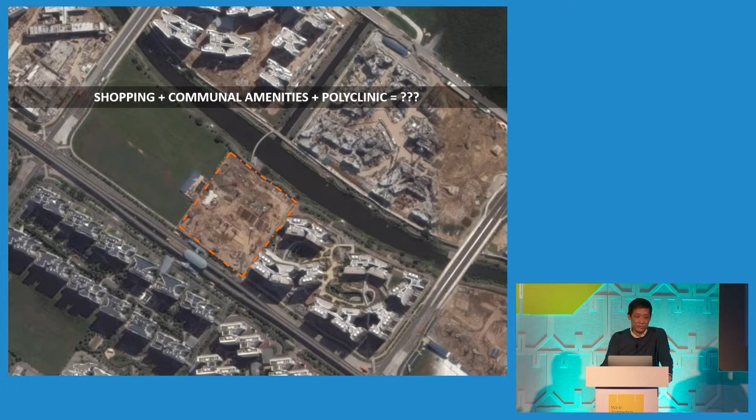In Koolhaas's Harvard Guide to Shopping, he wrote that shopping is arguably the last remaining form of public activity. So although insightful in certain measures, I do think there are other ways in which public activity can be nurtured. However, to date, the architecture of shopping in Singapore is this: a ubiquitous shopping mall, a superfluous monument of consumption as public activity. Its role is to internalize all activities, drawing the lifeblood from the street and the city.

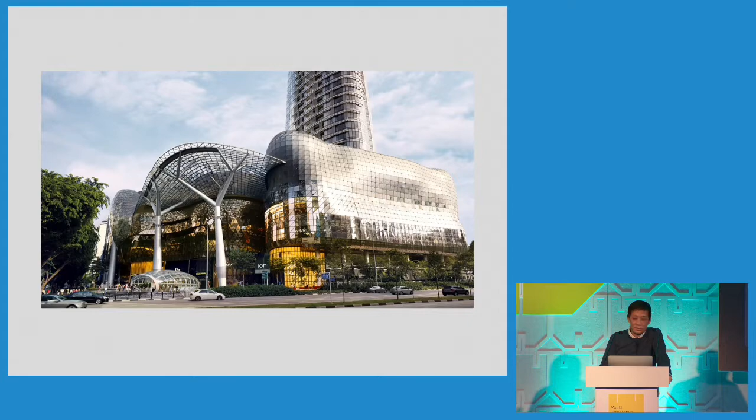Polyclinics and hospitals, on the other hand, are often designed and built as independent buildings set away from other programs and resources associated with the urban realm. And the closest independent typology is the community center. Historically, it's the town hall. Singapore, however, does not have this as a precedent.

So the main challenge for this project is not only for us to bring together these three disparate programmatic components in a new building typology, but also to harness an architectural grammar that will create meaningful communal spaces, and to script a programmatic strategy that will foster a sense of belonging.

So where do we look for precedent? We thought that with more than 80% of Singaporeans living in public housing, which is remarkable, the architecture of Singapore's HDB has grown over the years into what can be termed a common architecture, an equalizing artifact that is able to accommodate the plurality of life.

This architecture of HDB, especially from the 70s and 80s, has this quality of an open framework, an unassuming structural expression of what it contains. In fact, it can be argued that one of the most successful containers of social life in Singapore is the HDB void deck on the ground floor that you can find throughout the city. An open structure that is able to move from poetic emptiness, in wait for social life to unfold, to a space of celebration in union or in death.

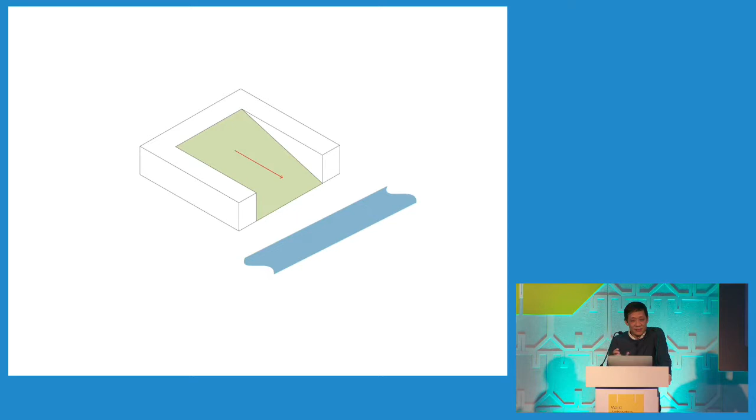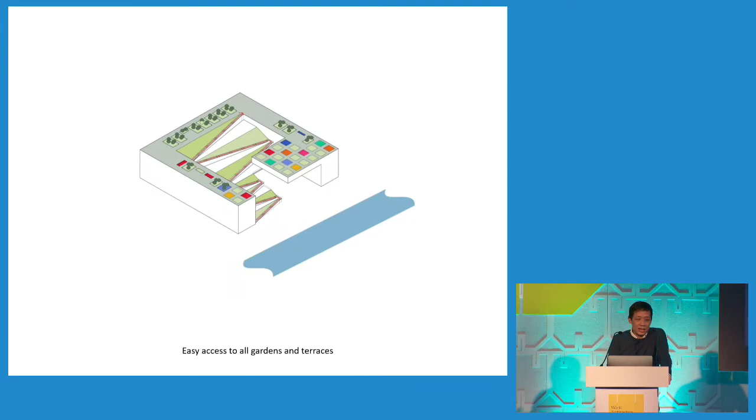Our first thought is that the neighborhood center should be conceived as a singular building that frames and cradles the garden. The garden fronts the waterways, creating a natural amphitheater towards the water's edge. This garden cascades down the entire height of the building and draws programs and dining activities close to the water's edge. A gentle ramp provides easy access to all the gardens and terraces.

They articulate the surface of the slope into several terraces. Plants define and shade each terrace. Every level of the neighborhood center and polyclinic has a direct view and access to the gardens.

Shopping is visible, vibrant, and eating activities spill out onto the verandas, but they will never drown out the public realm. So the terraces are filled with outdoor communal spaces.

Here is a play area fronting the pediatric unit. And as the garden matures today, the ramp now cuts across the terraces, and with each turn revealing different pockets of communal spaces: a hammock, a seat, a platform to stretch out, and so on.

Upon reaching the roof, and as one turns one's gaze onto the terraces, enchanting views open up to the waterways and beyond. The terraces continue to the roof, where they are used as urban farms for community horticulture clubs and also as exercise areas for senior residents.

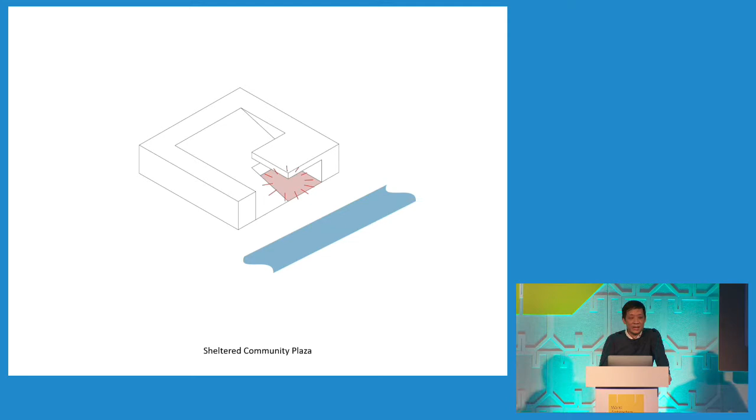Together, the communal spaces envelop the entire project and are accessible from the ground all the way to the roof. Upon framing the cascading gardens, the second act of framing defines a sheltered community plaza.

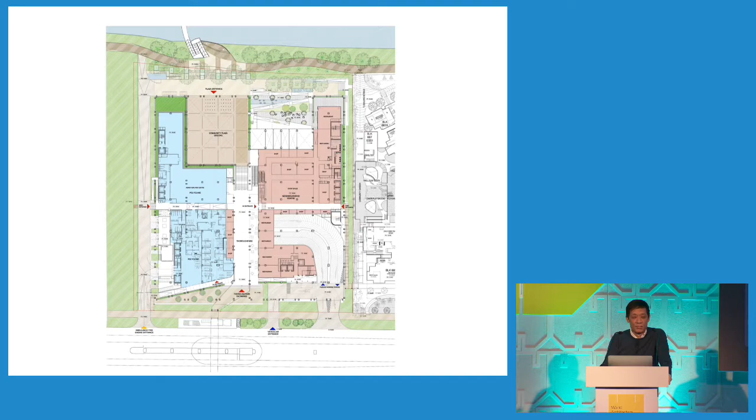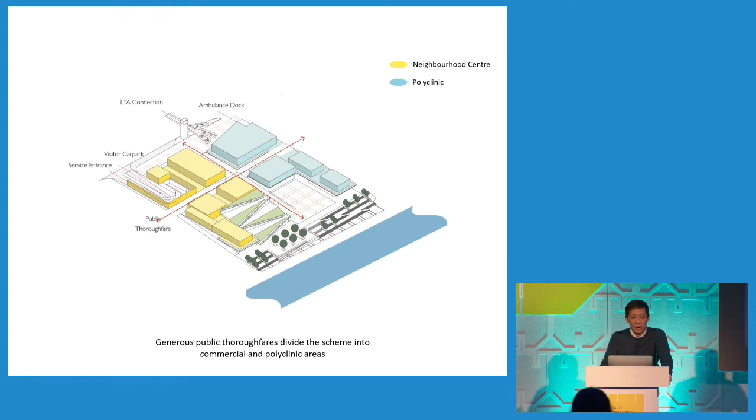This volume is well defined, four stories tall, and sheltered from the elements. Pedestrian circulation is threaded through from all sides so that meaningful spaces can be defined for public use, for pause, rest, and events. A generous public thoroughfare divides the scheme into the commercial area and the polyclinic area. This pedestrian path links the neighborhood housing estates together and draws pedestrian movement from the station and the road.

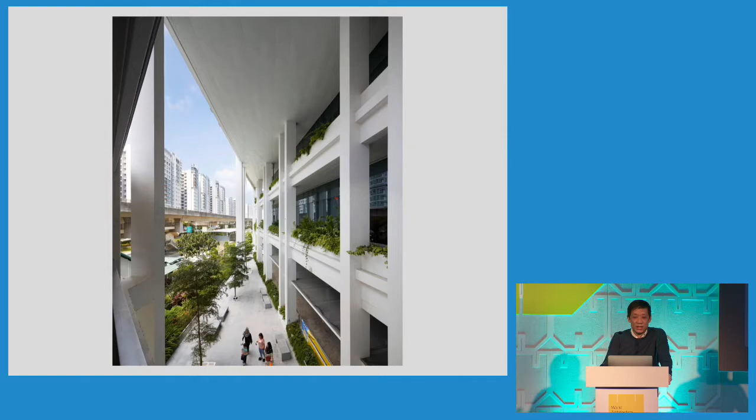The entrance is accentuated by a slight angling of the facade facing the LRT station, creating a doorway into a triple volume entrance. Here, the funnel space leads pedestrians onto the four-story event space. This is strategically placed at the crossing of the waterways and the landing of the pedestrian bridge.

This space is framed by a set of double columns, giving it an open facade with a plaited grid of AB rhythm. When it rains or when the sun is at its most searing, blinds will drop to further shade this space. This deliberately porous facade both defines and allows permeation through its threshold. This porticoed entrance gives a sense of civic dignity as one passes through the space.

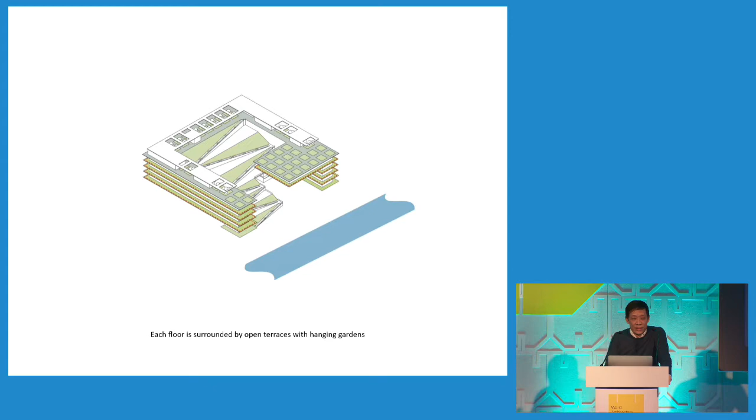As each floor is surrounded by open terraces with hanging gardens which overlook the communal gardens on the platform, they become a key feature of the elevation. The facade thus possesses a depth that overlays the vibrancy of the content and the nature that surrounds it.

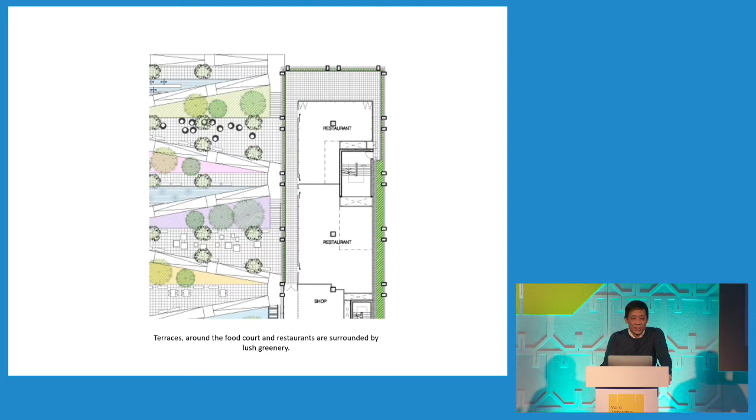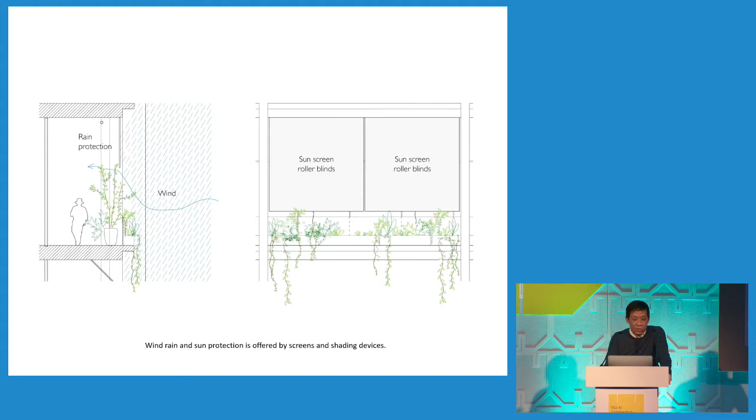This depth also translates into veranda spaces for communal dining and for activities to spill out and enliven the facade of the building. Here, one can dine facing both the waterway and gardens and contribute to the vibrancy of the place. These verandas are also sheltered from rain by roller blinds; here the blinds are fully drawn.

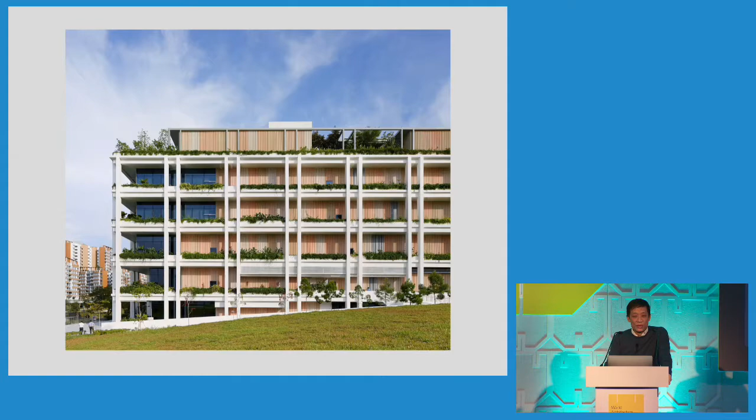The service facade is clad with precast stained concrete, and together with the double columns, offers a rich and animated face to the building.

So on a metacritical level, this project offered us an opportunity to think about architecture's wider role in conceiving and cultivating a sense of community.

More often than not, architecture that is restrained, rational, and repetitive is derided for its lack of exuberance. But it's precisely these qualities that make the architecture of public housing so familiar to Singaporeans, worthy of praise. We should understand this architecture as a mute background that enables the color of life to flourish.

And perhaps it's poignant that today, after 60 years, the birth of Singapore as a very young nation required a common narrative, and public housing was central to this effort. Similarly, the cultivation of a community and a sense of belonging requires a common framework. It is this very essence of a common architecture that we wanted to understand, to distill, and to revalidate.

So I think we have done this using a clear frame that creates a variety of communal spaces to unfold: the intimate scale of the veranda space, the all-weather event space, a covered plaza for the tropics, and the cascading terraces that draw users from the water's edge all the way to the roof.

It's actually unlike other commercial mixed-use developments as it puts communal spaces first. And it draws on a modest but ultimately common architectural grammar, that of the public housing of Singapore. Thanks.